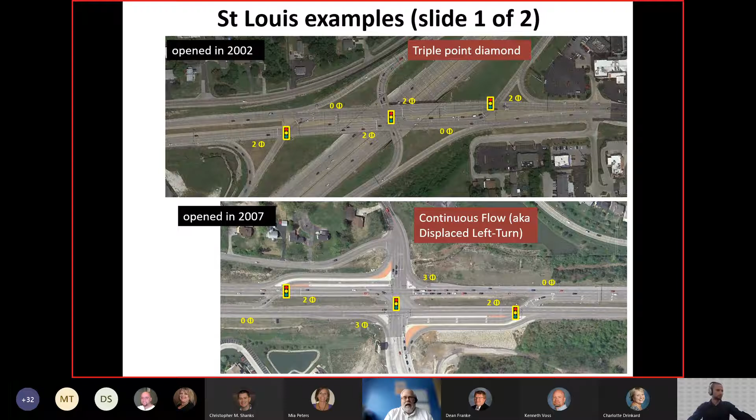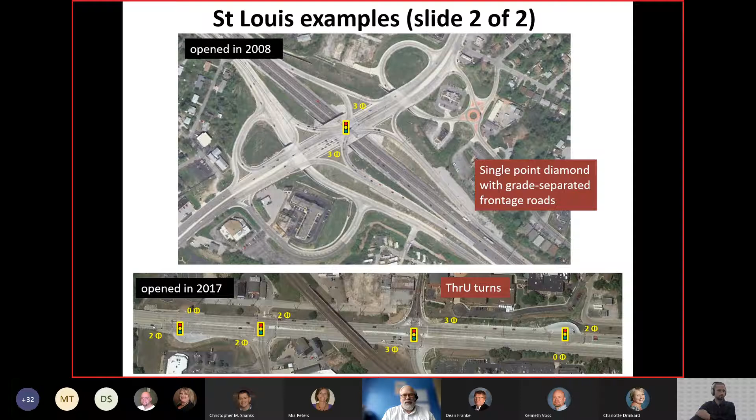So I'm not here to talk about what St. Louis has done, but we do want to recognize that there have been a lot of innovations across the state, and that we've learned from some of the innovations that St. Louis has done. These next two slides show some of the things that we have noticed over the years. But if you have any questions about these, feel free to contact St. Louis. I'm sure they'll tell you all about them.

This next series of slides wants to kind of recap some innovations that have been around for a while, but are still relevant when we talk about innovation.

This first one is roundabouts. In the Kansas City District, we've used them quite a few times at interchanges and at rural intersections. The one in the upper right is actually a St. Louis example where they used a roundabout to build an interchange with a two-way outer road. Another innovation that we have openly stolen from St. Louis.

But I think what's maybe important to me about roundabouts is having an approach where you consider them anytime you have an operational or safety issue. In our district, any rural two-lane roadway where we have right-angle crashes, our default is to look at a roundabout. When we're looking at our outer suburbs and two-lane roadways where we have rear-end issues, we look at the traffic volumes and see if it's close to warranting signals. And if it is, we start looking at a roundabout.

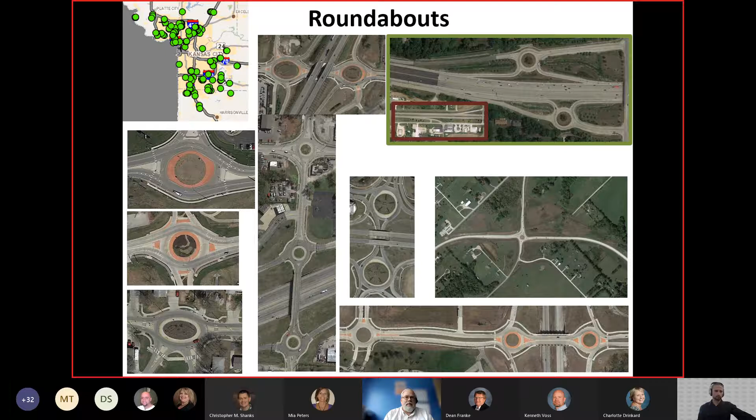Now this one is kind of an interesting one, and actually the ribbon cutting is supposed to be in a couple weeks for this. This is actually a roundabout interchange that Ryan and I both opposed. It operated far worse than a traditional diamond did.

The safety was quite questionable. We couldn't find any research on the safety of a six-legged multi-lane roundabout, and the data we could find for four-legged multi-lane roundabouts was very mixed. But the city was quite adamant they wanted a roundabout here, so the bulk of the risk was on the city system. We're like, all right, it doesn't impact the interstate negatively, we'll go with it.

Maybe we haven't talked in detail about traffic modeling yet, but on the flip side, this isn't one we're thrilled about the results on. Oftentimes we're looking at traffic volumes 20 years out in the future, so that's a discussion point to remember, that a lot of these alternatives we're weighing against each other are considering problems that are there today and that might be there in the future. The stakeholders in this case felt that traffic growth in the future might be a problem to solve later, but since there's not congestion today, they were more open to maybe the capacity constraints of this roundabout.

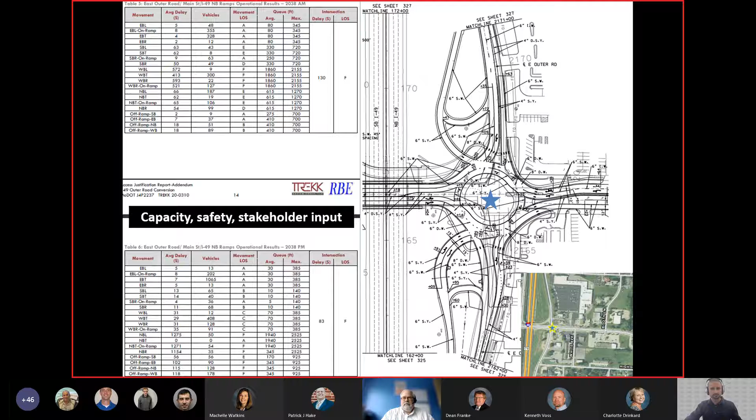Another current favorite is J-turns. We have implemented quite a few of these on the rural 50 corridor in our district. There's a lot of ways you can go about building a J-turn - short J-turns, long J-turns, lefts allowed, lefts prohibited. My personal favorite is the short J-turns, but MU's research on J-turns showed that longer J-turns were generally safer.

So whenever we can, we try to build our J-turns long, but site-specific characteristics don't always allow for that. Something new we've started doing with J-turns is on US 169 on the north side of our district, where to the south of this section US 169 is a freeway, and to the north is a 5-lane signalized arterial. So we have this transition area where it's not a freeway but not an arterial - it's truly an expressway. We've got a lot of development going on in that area, and developers have built one J-turn, and we're in negotiations with another to build a second J-turn to act as a transition from freeway to signalized arterial.

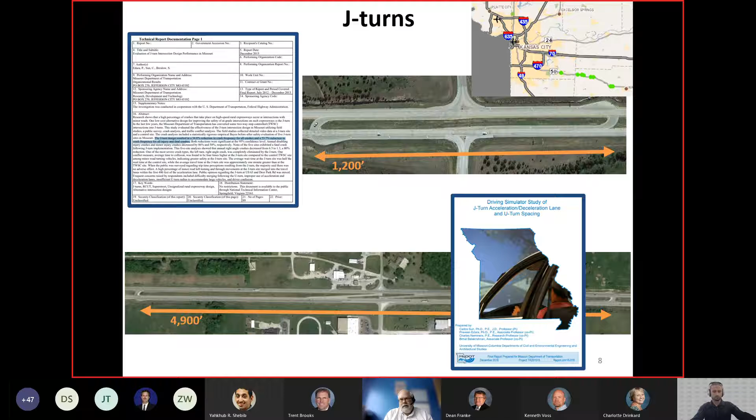Here's one of the J-turn locations on 50 Highway. This slide is just to highlight how over the years we've tried different things to fix our crash problem at US 50 and MO-131. We added turn lanes, then we added offset lefts, and finally we've gone to J-turns. If somebody finds something better than a J-turn, I'm sure we'll implement it here as well.

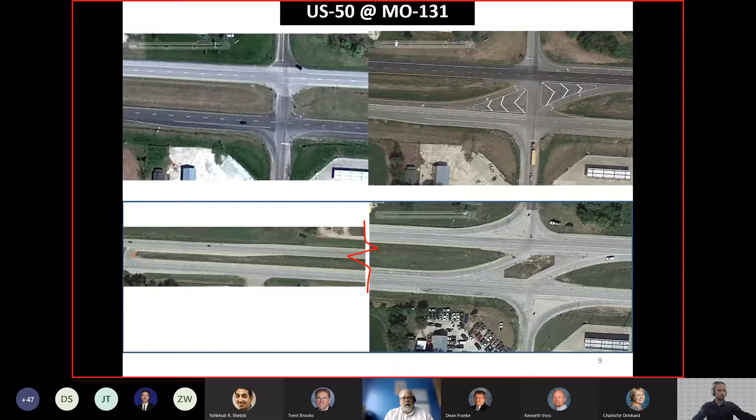Then of course we've got the flavor of the month, Diverging Diamonds.

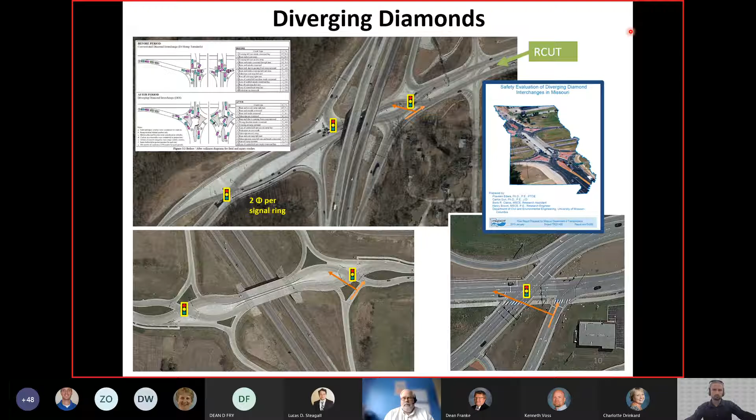This slide talks about some of the challenges with a DDI. Probably one of the biggest is maintenance of traffic. Anytime you convert from one traffic control type to another, there's the challenge of switching from old pavement to new pavement, and DDI is no exception. You really have to be mindful of making sure you always have pavement in place for traffic to traverse during construction.

Another interesting piece of the DDI is the turns—do you signalize them or have them yield? I understand Springfield has even implemented flashing yellow for the left turns, which we haven't done in our district yet, but I'd be interested to see if there are locations that would be good for us to try that. And then there's the whole right or left turn on red question.

Kansas City is interesting in that the city has an ordinance allowing left turns on red, whereas the state does not. So far we've decided to remain silent on the issue, and I haven't heard any feedback that there have been any problems. I think we'll continue to maintain silence on it, but someday hopefully we can get a statewide left turn on red law passed.

The other aspect is anytime you have turning or curved movements, you have to be aware of your design vehicles. With a lot of these interchanges occurring on the interstates, there are a lot of large semis, so you have to be aware of their tracking movements and make sure they can traverse the turns. Anything you want to add on this one, Ryan?

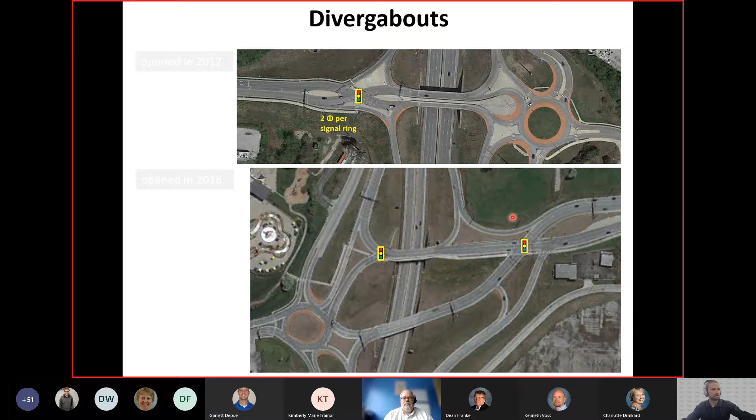The top of the screen is a location at I-49, the freeway, and 155th, the arterial. The bottom of the screen is US 50, the freeway, and Route 291. I'll go through some of the details on those jobs.

The first example location had no pedestrian accommodations. It was in the STIP for a bridge replacement, and it already had substandard vertical clearance. It started as a conventional diamond, and the operations weren't atrocious during construction, but there's significant growth predicted on the west side, particularly at the interchange.

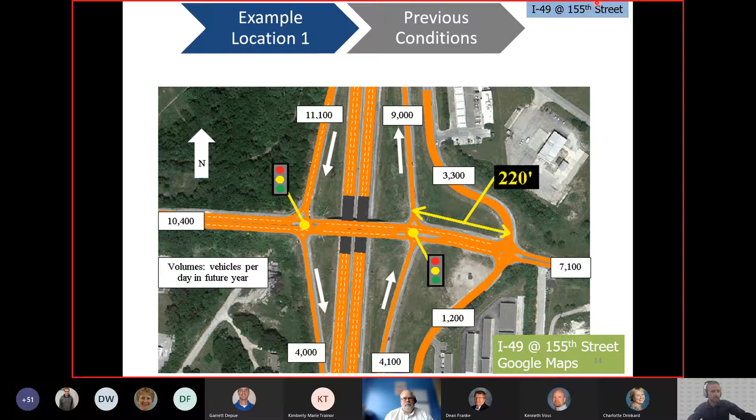You can see some of the volumes here, and again the west side and north side are heavier traffic volumes. So we wanted to make sure our traffic models considered that in the future. You can see the highlight on the 220 feet between the northbound ramps and east outer road, and that was really important as we looked at alternatives.

The program we use a lot is called VISSIM. One of the cool things about VISSIM is it's very customizable. It maybe takes more time to set models up, but the results are more detailed and more powerful than some other tools. Not to say VISSIM is always the right tool, but in this particular case it worked out really nicely for us.

Here are some of the alternatives we looked at, and we did cost estimates for all of these to try to narrow the options and figure out what would be best. Relocating the outer road, as you see on the bottom, is a common approach. In this instance it was unfeasible because of site constraints - there was a cell tower in the southeast corner, so the right-of-way implications were simply too much.

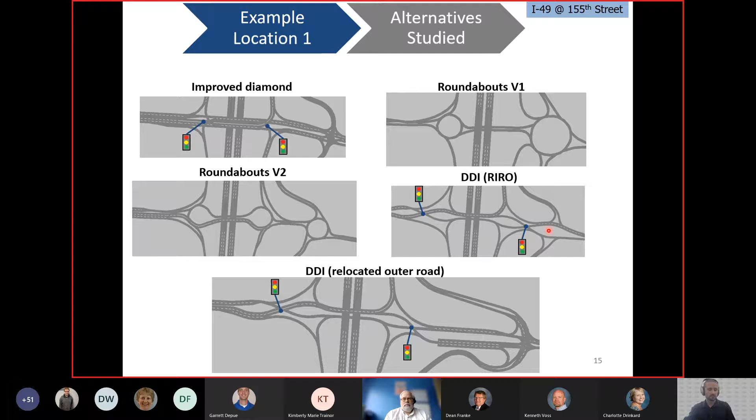The other common alternative with DDIs is the right-in, right-out, this acronym here. You can see this east outer road - there are no lefts allowed at that location, again a function of the distance to the crossover. When DDIs get built, generally the signals get further from the ramp terminals, so the spacing to the outer road is even more problematic. That's how we came up with using the roundabout as a way to flip the DDI back over, if you will.

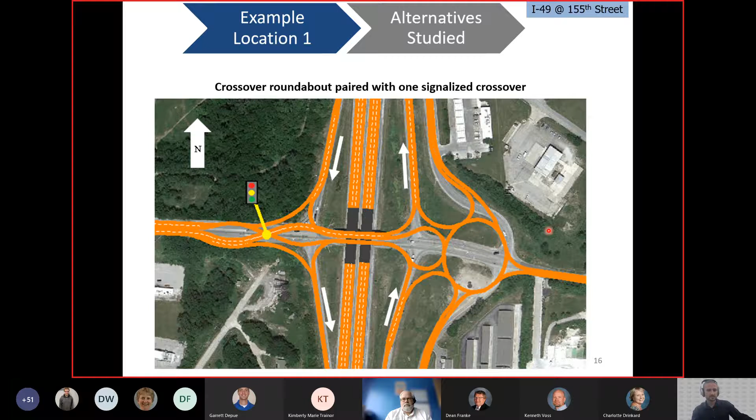So you have the DDI on the busier side of the interchange, whereas the roundabout, in this case, is just a single lane roundabout over on the east side where there's single family homes and less growth anticipated.

Here's a summary of some of the volumes we considered. This is trying to convey that the volumes entering and circulating at the roundabout for a normal roundabout would have been much higher than with this divergabout, this combination of diverging diamond roundabout. As you lower the sum of the conflicting and entering volumes, you're able to provide better levels of service longer, with less queuing and less delays. So the divergabout, this proposed design, reduces the conflicting plus entering volumes.

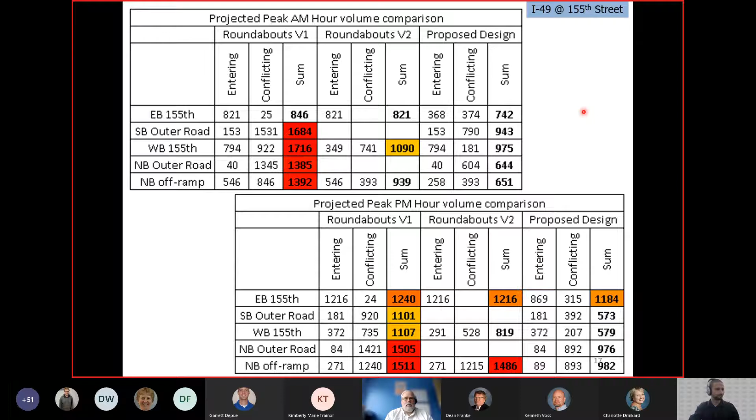Another thing you'd look at is delay of vehicles and travel time - these are the measures of effectiveness, the MOE, that VISSIM can provide us.

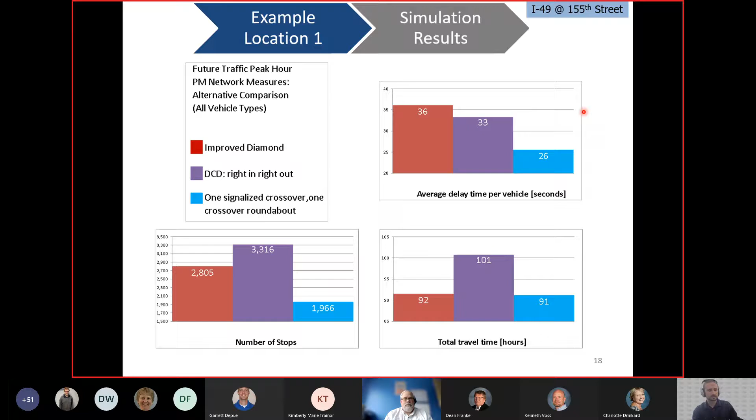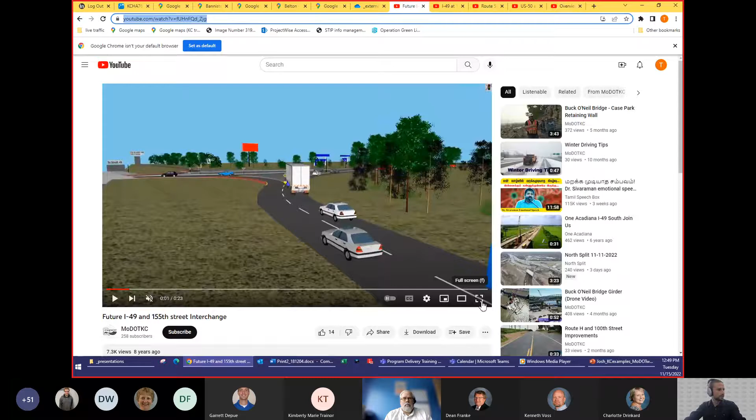Here's one of the public outreach displays we had. I'll show some of the other material that we used on this job.

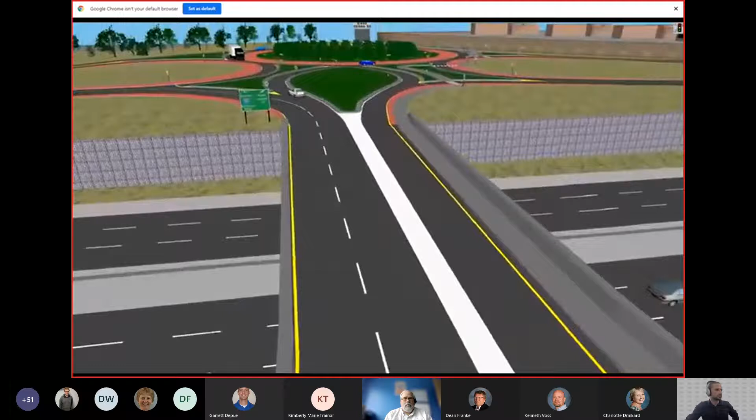So here is a video, again from VISSIM, just demonstrating a certain movement from this interchange. We wanted to demonstrate the unique movements for the stakeholders.

This is kind of the one I talked about where on social media, some people say, oh yes, okay, I understand what you're trying to do, and others say, oh my gosh, what are you doing, you're just trying to be different. But ultimately, what was attractive to us about this was the bridge width and some of the other attributes that roundabouts and DDIs can provide.

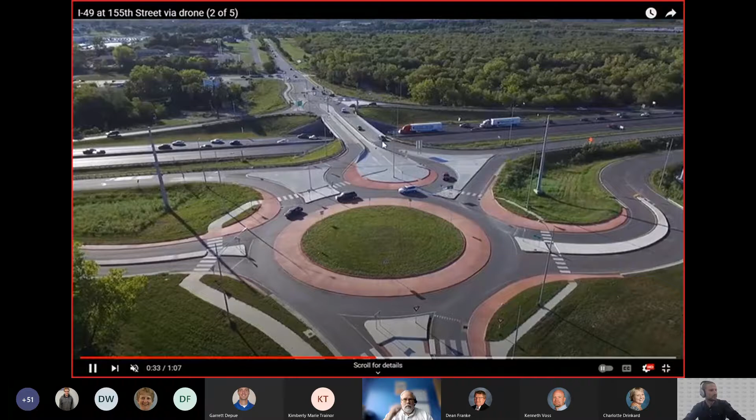This little video is going to rotate around, so currently we're looking west. You can see down here on I-49, that's sort of an afternoon congestion issue on the freeway. Here we're looking west on 155th, and you can see the single lane roundabout operating next to the DDI portion on the west.

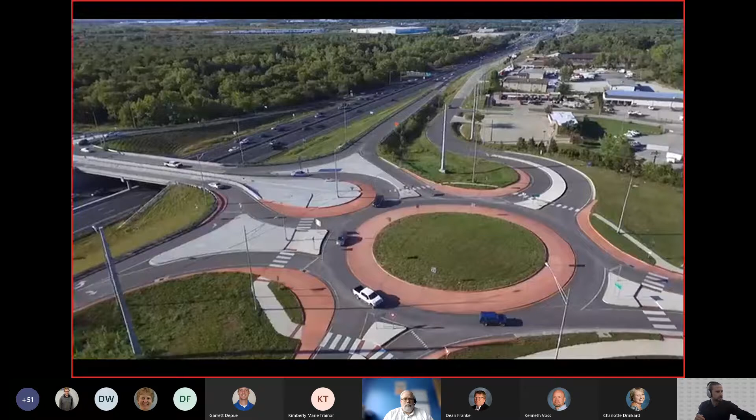This is a nice view of all the pedestrian facilities here. This location, when we started the job, had no facilities at all, especially on the bridge. You can see the shared use path on the south side, and then as it crosses into the DDI, the path is between the two directions of travel.

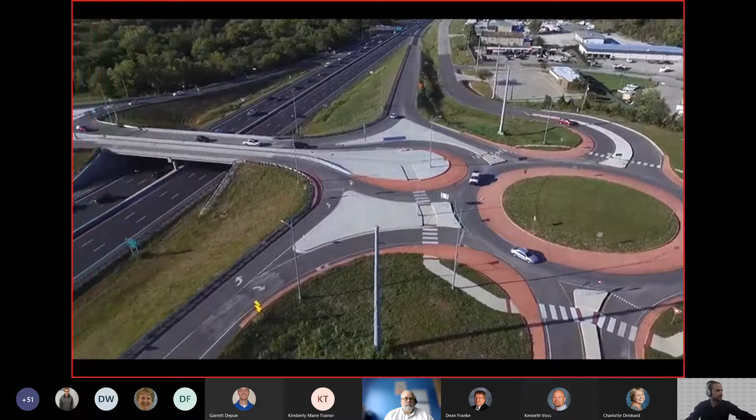Maybe we'll talk about that for a second, Josh. That's kind of a hot button thing, DDIs and having the pedestrians in the middle rather than on the outside. Do you want to talk about the history on that?

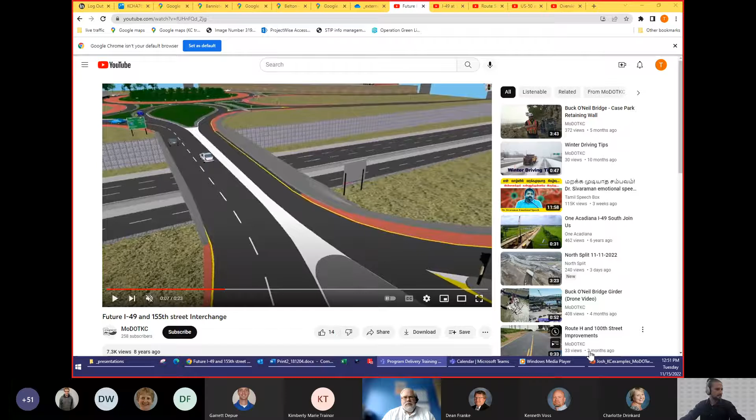We were really uncertain of what to do with the pedestrians, because if you put them on the outside, as is typical with any interchange, you have a conflict with that free left movement coming from underneath the bridge. So we really struggled with what to do with the pedestrians, and give credit to Springfield with their first DDI, where they put the pedestrians in the middle, reducing the number of conflict points for all the crossings of vehicular traffic.

But one of the downsides we've heard quite a bit is that it's kind of uncomfortable walking in between two directions of traffic. So there's a sense of unease about having pedestrians in the middle, but in terms of safety, I think it's the better way to go if you can pull it off.

It's also interesting how some folks bring up the fact that you're crossing perhaps twice to go through. Maybe the counterpoint is that there are shorter crossings and the signal phasing is such that you're definitely going to get enough time to cross safely. So there are pros and cons to everything.

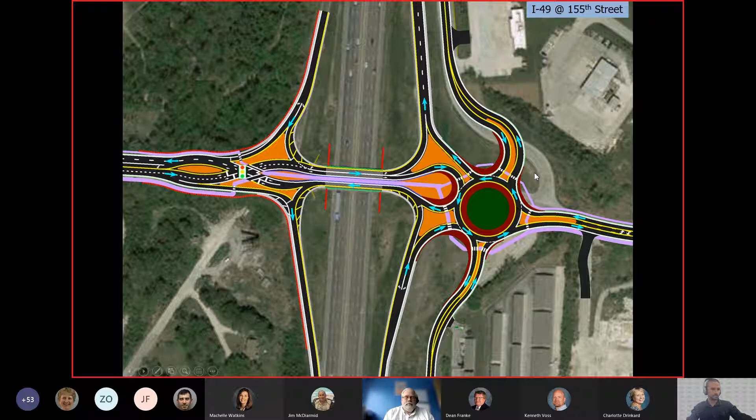I just wanted to quickly talk about signing. That's one of the details that was an in-house design the core team worked through, trying to visualize where these signs needed to be, how many is too many—finding that sweet spot is interesting on every project.

This was later in the process, some of the changes involved diagrammatic signs, or simplistic signs. Since this one was single lane, it was really nice that we avoided larger overhead signs.

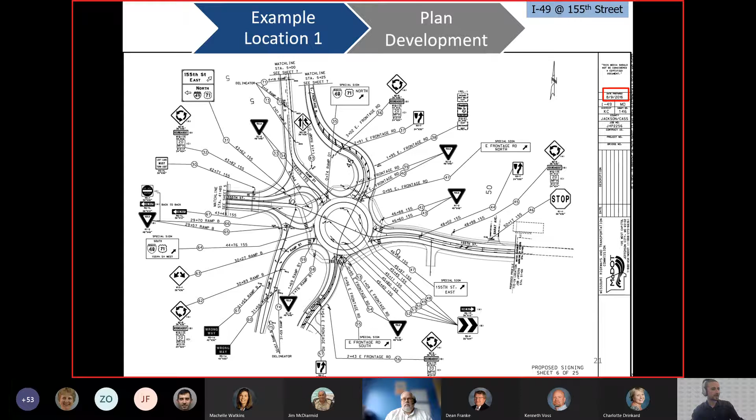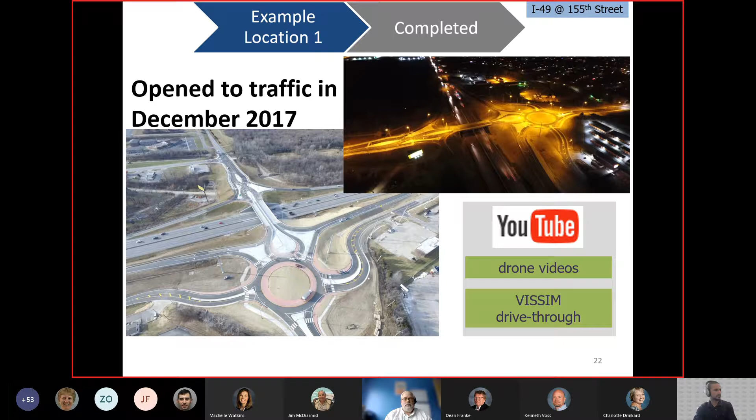So we've seen some of the videos on this one, and that one was opened at the very end of '17. Okay, I'm going to jump to the second interchange location now.

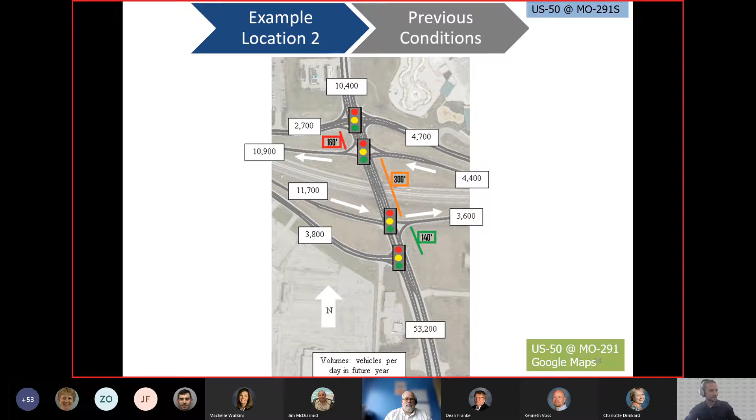The north is sort of like the downtown area of this little suburb, and the south is becoming more like an expressway. The ramps again are heavier on one side than the other, heavier on the west side. So a lot of the heavy movements are northbound left and eastbound right.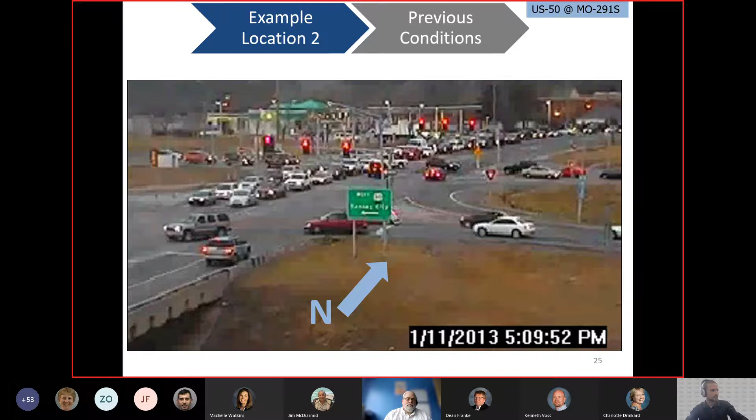These were some pictures of the congestion in the previous condition. Morning and afternoon, there were some pretty good queues out there. It was a 5-lane bridge, with 4 signals pretty close to each other—I guess the 5th being the South Outer Road.

Kind of like the last location, here are some options that we tested out in Vissim: tight urban diamond, single point diamond, offset left, DDI, and loop ramp variations.

The DDI performed pretty well, but again, the struggle was this distance to the North Outer Road was just so darn short that with a DDI, the way the signal timing works, it's very hard to not trap people in the middle. You're almost guaranteed to have a queue spilling into the DDI or from the DDI to the Outer Road. In a minute, I'll show you another display that visualizes that.

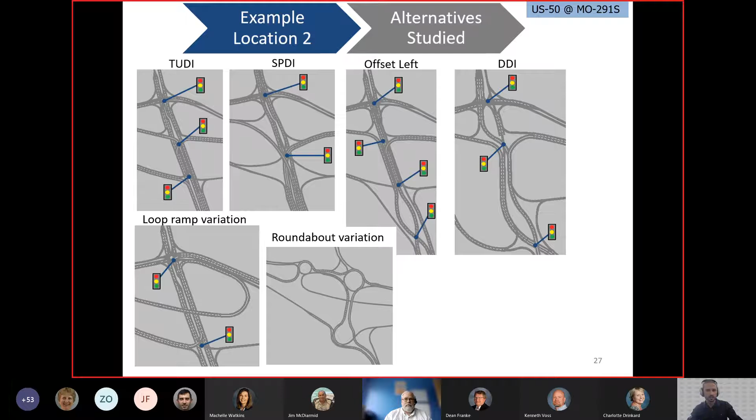So kind of like the last location, thinking about the roundabout volumes conflicting and entering compared to a normal roundabout, this Divergeabout, using the DDI and then flipping the roundabout over, was really nice at this location because of the traffic volumes.

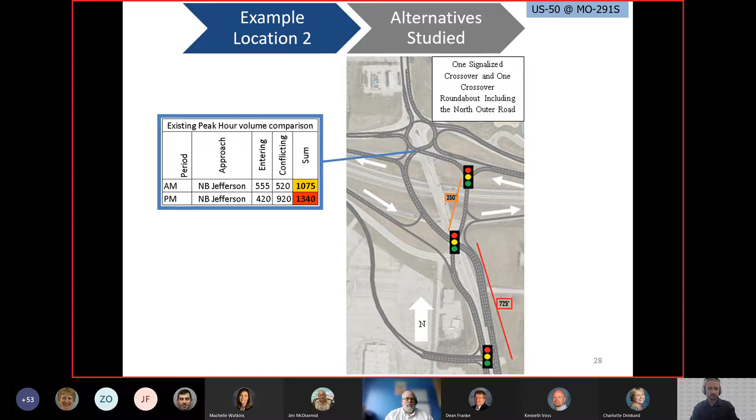Again, we looked at delay and travel time of all those different alternatives to narrow our alternatives down to one preferred alternative.

One of the interesting things about this location is a 2-phase signal here, and the reason for that is we have 2 westbound left turn lanes. So rather than treat that as a yield, we signalized that. And we were cognizant of this distance and didn't want any queues to spill from one intersection to the next, so there were special detectors on this job to keep that area clear.

Like the last one, signing was very important, this one probably even more so. Unlike the last one where a single lane roundabout sufficed with future year volumes, this one uses a multi-lane roundabout, so it's more complicated. You can see some overhead signing and the spiraling pavement markings associated with multi-lane roundabouts.

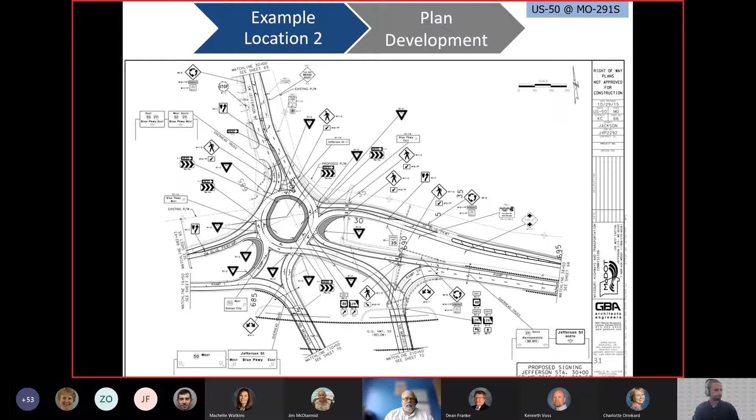I'll pull up some here real fast. I'll just show you this.

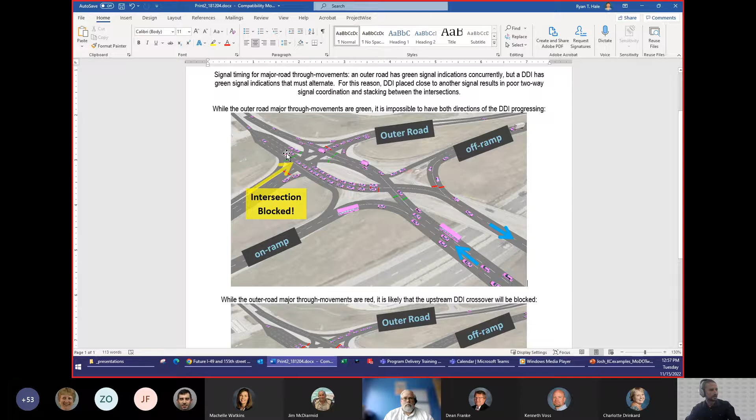Why not just build a normal DDI? I was talking about the difficulty since we're looking northeast here—this is the westbound ramp terminal. Since it's basically split phased, you'll never have the through movements going at the same time, so you're always going to have a really hard time keeping either southbound or northbound clear. It's especially problematic in a DDI when it spills from the outer road into the DDI, because one direction is blocking the other. Notice how this truck is pretty darn close to preventing this car from getting through the interchange.

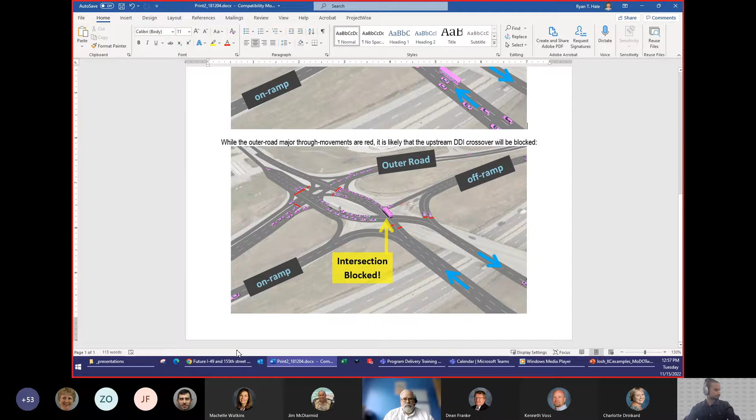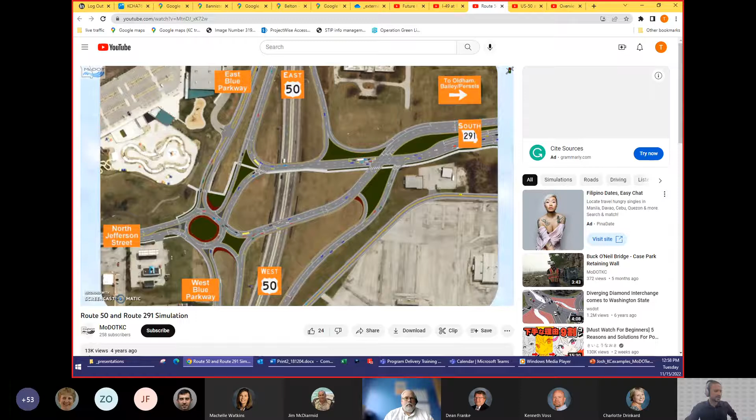Again, we did a Vissim model to show our stakeholders what this might look like. This one was really driven a lot by the city—they were funding a lot of this job, so working with them and communicating these ideas was important.

Again, it seemed like the overhead views are maybe sort of daunting for people, and we don't want to scare people, of course. So we found that these perspective videos that walk through certain movements are maybe a little more effective at putting people's minds at ease about, okay, here's how to be signed, here's what lane you need to be in, that sort of thing.

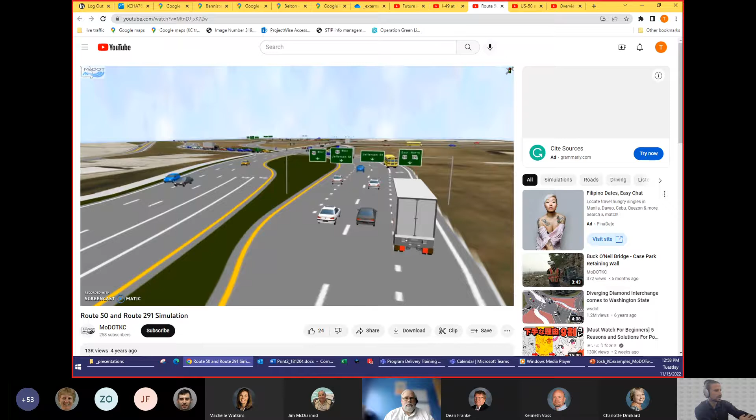So I'll just let this play for a few seconds. It'll just kind of go up to the north side of the site.

Josh, anything to add at this? Nope, not at this point.

All right, I changed my mind. I do have something to add.

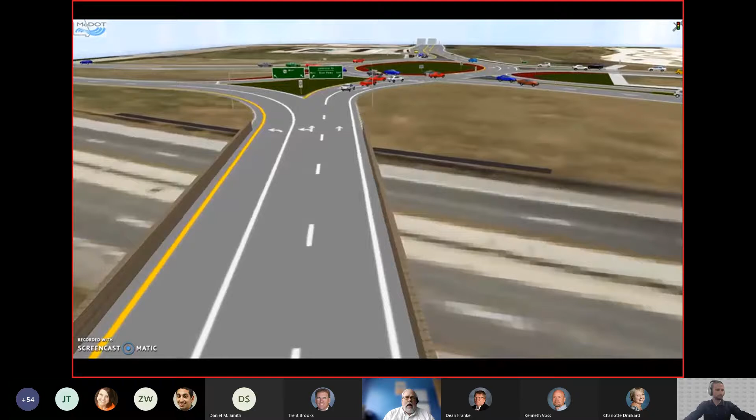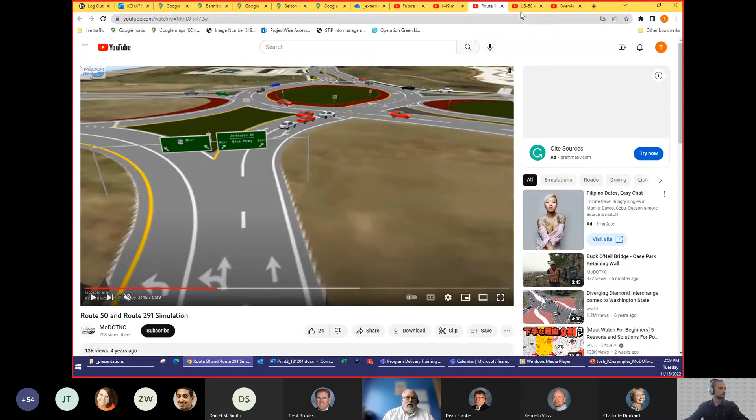I think it's one of the important things to consider when looking at a roundabout interchange versus a divergeabout interchange is the movement that has to yield. At a typical roundabout interchange, vehicles entering the interchange area have to yield to vehicles exiting. But in a divergeabout situation, the vehicles exiting the interchange have to yield to the vehicles entering. So if you have high through volumes, you have to be careful not to create a situation in a divergeabout where traffic trying to get out of the interchange is blocking other movements.

Good point. Thanks for bringing that up.

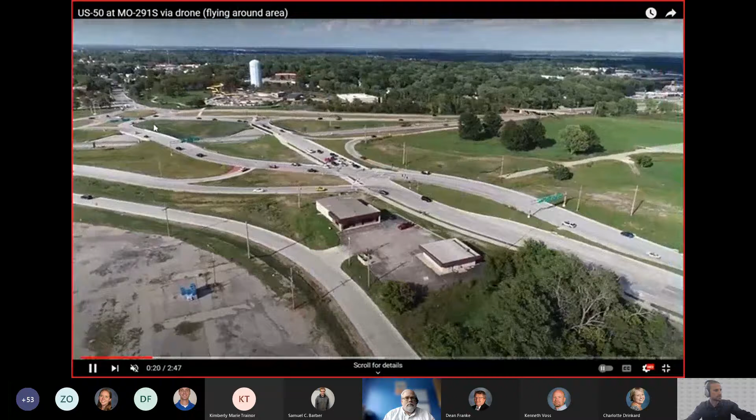In this case, let's say hypothetically we had built a single northbound lane entering the roundabout. When we tested that out, we found really problematic queuing, and the drawback would be that the queue would spill to the south and then toward the DDI. That's why we ultimately went with the multi-lane roundabout in this location.

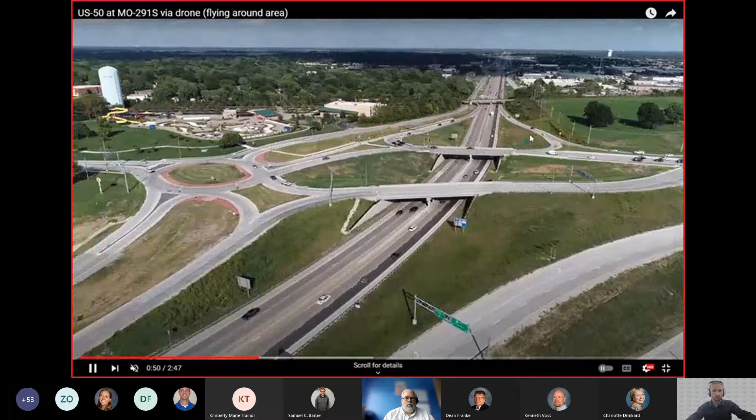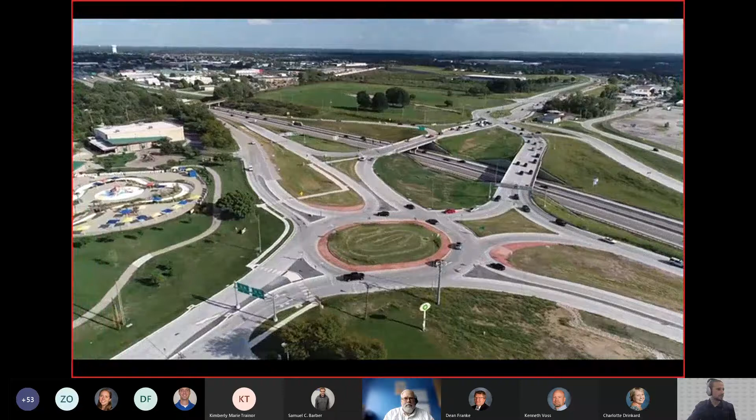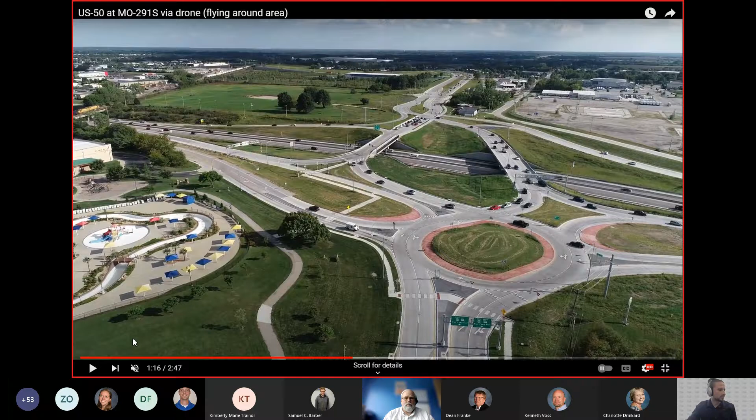This one was opened, I think mid-2018 maybe. You can see here, same approach with drone video. Most of the biggest queuing we saw previously was back in these areas, the northbound traffic. Since this opened, I'm not aware of any congestion at this spot.

The city was also really excited about this interchange project because they have high hopes for the nearby vacant land. Remember how we talked about that side of the interchange already being higher in volume, and it's predicted to get even larger. So that worked out pretty nicely with this geometry.

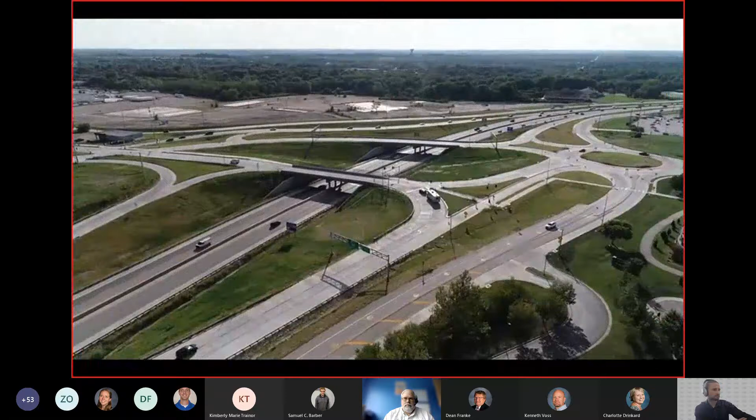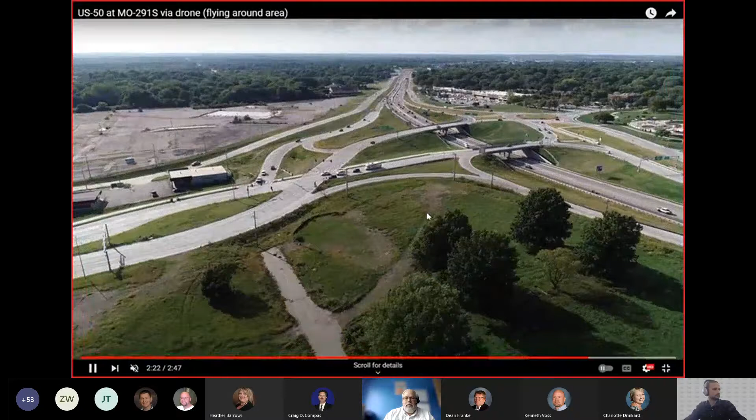You'll notice as the drone was going around that there was a water park there, and that was one of the constraints on relocating the outer road. We have a railroad just to the east of this interchange, but then this park, so we really couldn't move the outer road, and the diverging diamond allowed us to bring everything together into one intersection.

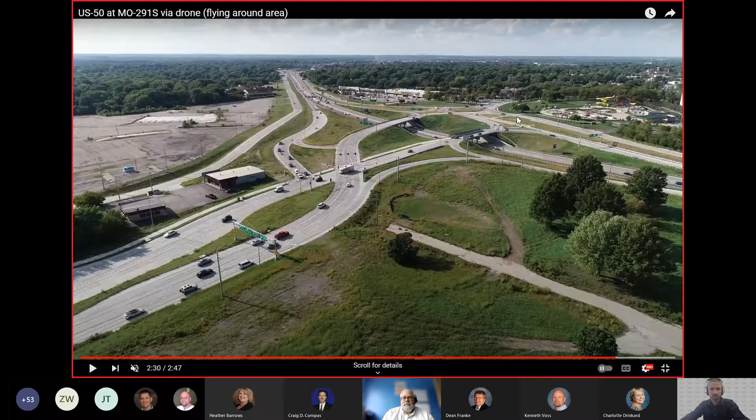Yeah, that's a good point, Josh. That's kind of another common thread those two example locations had, that relocating the outer road just wasn't feasible.

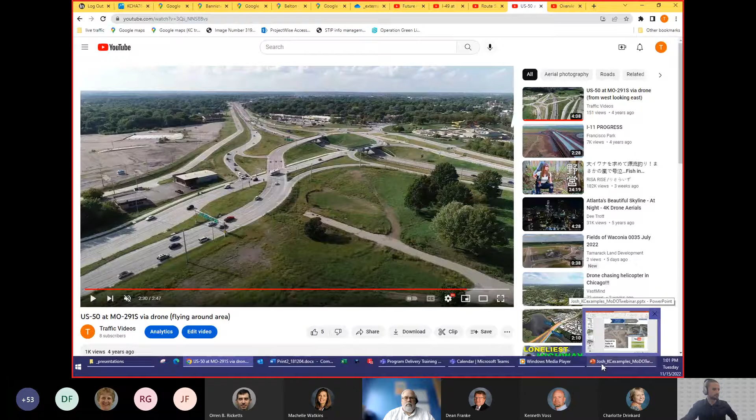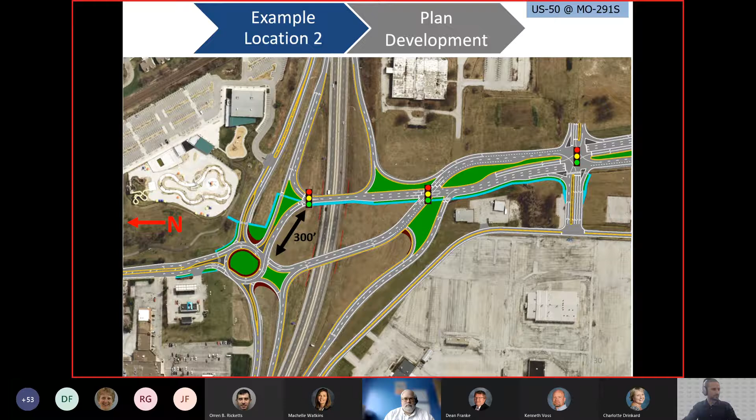I guess I didn't highlight the pedestrian facilities, but that was an important consideration on this one. You can see this light blue color, where they're sort of in the middle of this DDI, if you will, where they don't have to cross this free-flowing left turn. That's definitely a location where myself and other pedestrians are enjoying the connectivity now.

Okay, one more detailed alternative that we'll talk about. This one is kind of on the north side of the city. It opened in very late 2019, I think it was. It's a displaced left interchange, sort of a cousin of a single point and a DDI, if you will.

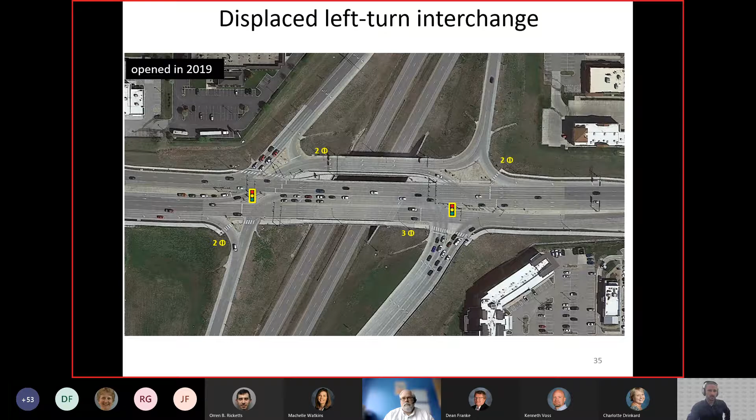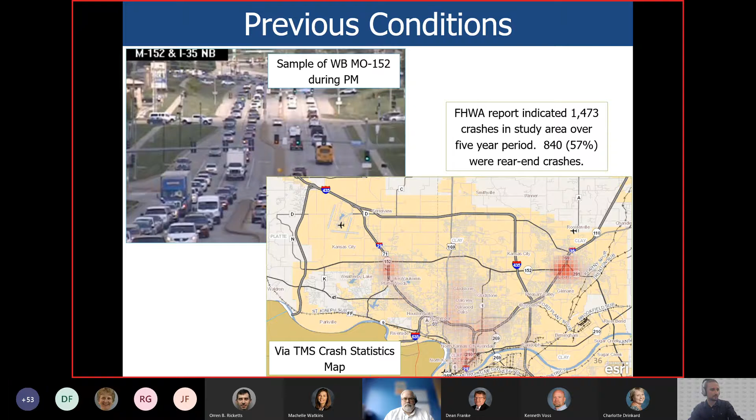Before this interchange was done, there was significant congestion on the corridor. Here we're looking east along the corridor at some westbound congestion, and then you can see the TMS crash map down on the bottom right. It's pretty zoomed out, the whole metro area. You can see this interchange area, it's 35 and 152, really stood out as an area that could have used some improvement.

A lot of rear end crashes, which is maybe indicative of congestion. So like the other locations, we used traffic models to try to weigh some pros and cons of different alternatives. We looked at a traditional diamond, single point, DDI, and like every other job, none of these is a magic bullet. It's not, oh, DDI is popular this year, we got to build a DDI. It's all about traffic volumes and growth, pedestrians - all those attributes are site specific.

But unfortunately, our left turning volumes weren't really balanced in this case. We had a lot of northbound lefts, but not so many southbounds. So giving all that time to the southbounds, because in a SPUI they're concurrent with the northbounds, wasn't really very advantageous. Also the clearance intervals in SPUIs are very challenging. This one's also on a skew, so the bridge would have been ginormous.

The DDI at this location really struggled because the east and westbound through movements are both really high. In a lot of locations where we have success with DDIs, it's because the volumes are really directional, not balanced throughout the day. But here, if you have a high volume in each direction, they basically have to wait on each other at some point - you can't have both directions getting green simultaneously. So the DDI in this case didn't really work out.

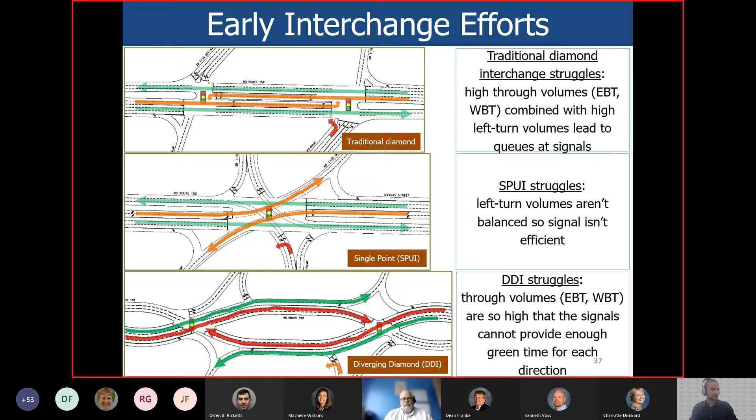Whereas this displaced left, where there's different signal phasing, is a lot more efficient. Rather than 3-phase signals at each ramp terminal, we're able to move traffic a lot quicker and safer. So it was pretty staggering differences in this case, where we had a lot less delay in travel time, and a lot more vehicles were able to get through with this displaced left geometry.

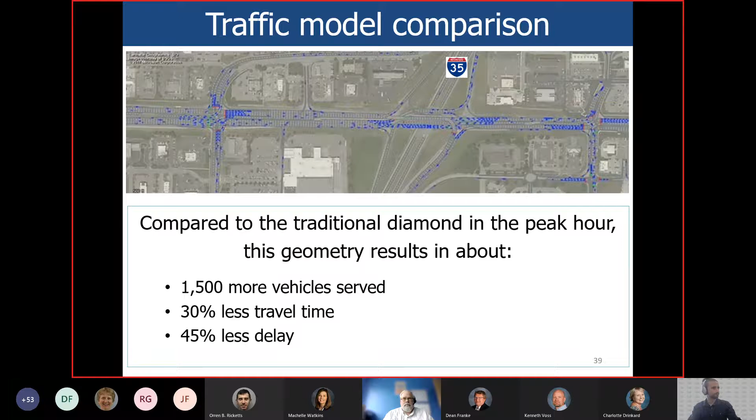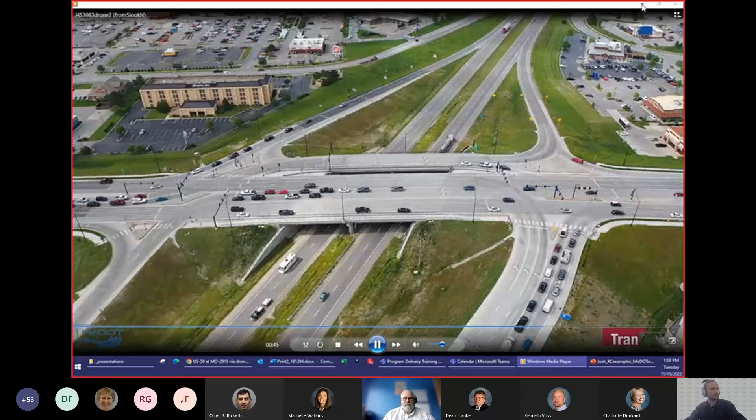I think we also had a similar VISSIM video. So just like the other ones where we wanted to focus on certain movements to kind of demonstrate to folks how they would drive it.

It's kind of funny at the public meeting for this one, if my memory serves correct, some of the ones with roundabouts, people are a little bit more hesitant about. For whatever reason, roundabouts are more daunting, but DDIs, at least in this part of the state, folks have really bought in. And when we showed them this video, it was actually kind of funny that we had to convince them, well, actually, it's not just like a DDI, because when they saw this, they said, 'Oh yeah, I know that. I do this movement. I've done that interchange before.' So it was kind of a unique situation where we talked about the similarities and a little bit of the differences.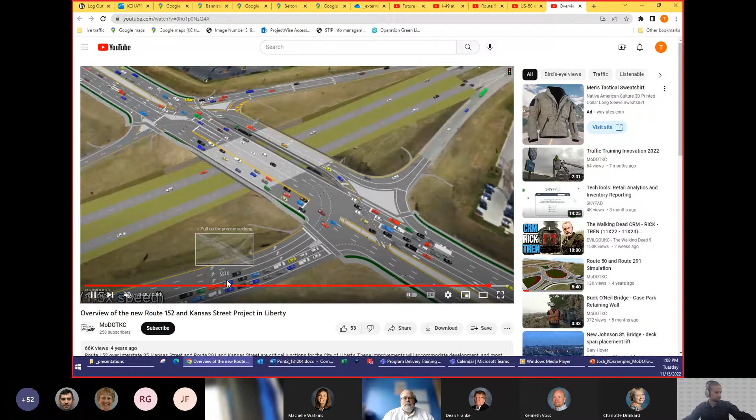Anything else on that, Josh, before I hand it back over? Nope, I think you covered it all.

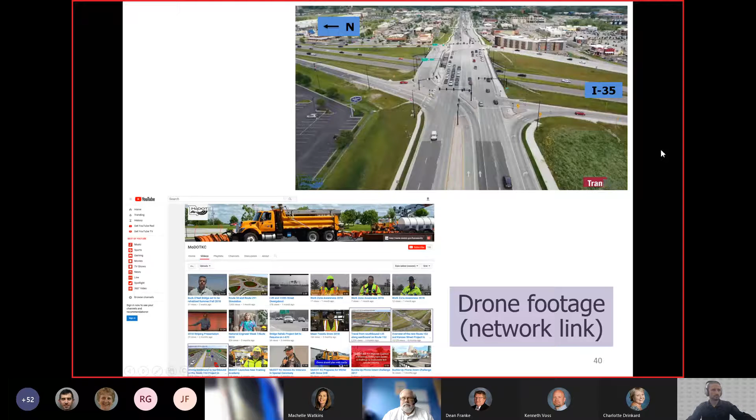And so then we're going to wrap up our presentation talking about some other innovative things we've done, as well as some things we've thought of but haven't been able to accomplish. So this first one is an interchange up north, actually just interchange one south of the one we just talked about, at US 69, Pleasant Valley, and I-35, where we had this antiquated design where the ramps were in the middle of the interchange, as you can see on the left side. But having a crossroad with another arterial coming in kind of from the corner really presented challenges of, okay, so how do we get all these movements to and from the ramps to 35? And what we came up with was actually, we put 3 of the ramp connections on the east side of the interstate, and then the 4th one is on the west side.

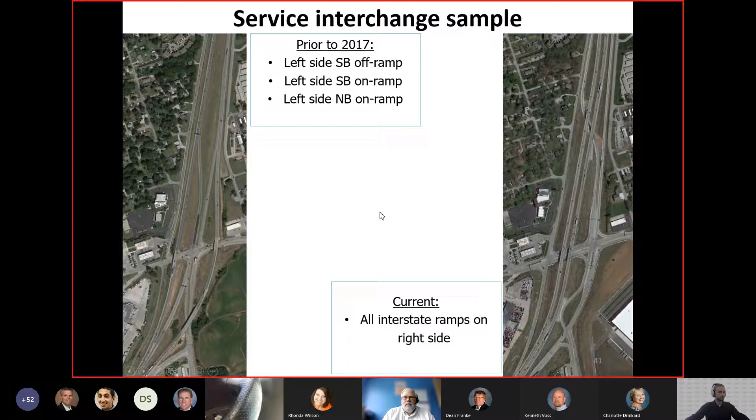Like all these others, we looked at every variation we could think of, single points and that sort of thing. We settled on this variation of an offset single point interchange, where we put 3 of the ramps on one side and the 4th on the other. Anything you wanted to add on this one?

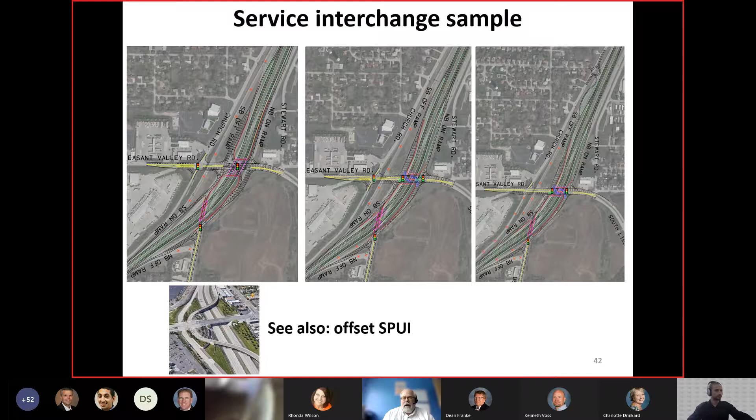Next, and this one's maybe a little bit different. This was a project we were doing on I-435 on the south side of Kansas City, where we have several closely spaced interchanges. We were trying to figure out how to accommodate all this on and off traffic. The traditional solution is to do a CD road when you have closely spaced interchanges.

What we discovered was that when we combined all of those ramps into a single entrance and exit from mainline, we were actually creating hotspots of traffic entering and exiting mainline I-435. So we wound up basically leaving 435 with the closely spaced interchanges, because it spread out the entrance and exits from mainline.

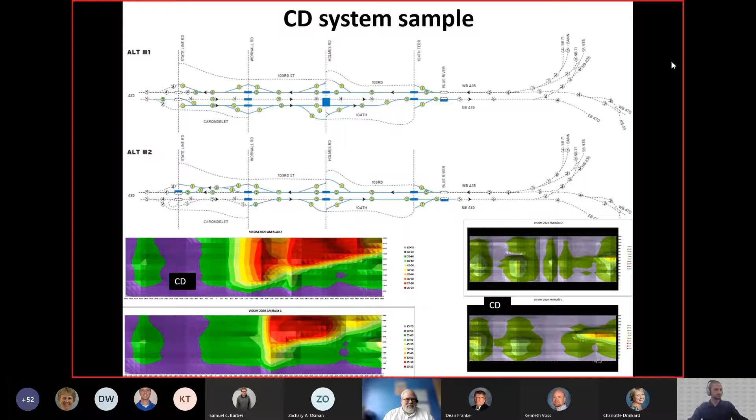Ryan, anything you want to add on these examples? I guess it's fun to do these gigantic jobs where the bridge has to be replaced and there's millions of dollars on the line. Sometimes it's really impactful also to see spots like this that were on our scoping list for congestion issues, and then we can fix it in a week.

After you're modeling it and stuff, maybe you don't need a wider bridge. Sometimes we have these thoughts in our head about, oh, we've got a traffic jam here, and by golly I know how to fix this - we're going to do this and this and this. Maybe we can buy ourselves some time with something simple like signal timing. On these, it's important that you work with your traffic engineers, because innovative signal timing sometimes requires specialized signal equipment that you may have to work through as well.

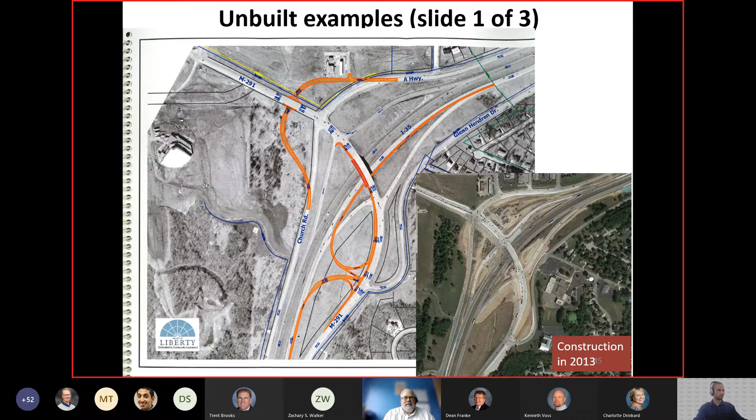Now this intersection type is kind of unique, where at the main intersection you don't allow any lefts. All the lefts are forced onto a quadrant road - another road around the intersection. This allows your main intersection, which is often congested, to operate freely, while you put all the left turning traffic onto this quadrant road. These secondary intersections are usually less crowded, so you're able to give adequate time to the left turns.

We've analyzed them in this type of intersection at a couple of locations. It's never really risen to the top, but we keep our eyes open, hoping that someday we'll be able to fix something that can't be fixed by anything else with a solution like this.

Maybe something just in the weeds, but one of the things that's come up about this concept is that unlike the J-turn or the R-cut, where you're using islands that prohibit certain movements, with this configuration you're really dependent upon drivers to not make a left where they physically can. So that's maybe a pro-con to consider, where if people really want to make a left, technically they could.

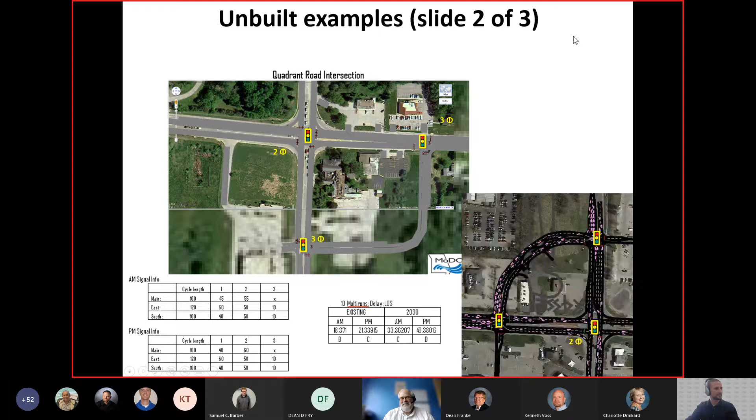Maybe the St. Louis people are just better behaved than the Kansas City people. I don't know. Somehow I have a doubt.

And so this last example is actually at the I-70 and I-470 interchange, where we have a service interchange that's way too close to the system interchange. The traditional approach is to braid those movements to get the proper spacing, but our concept is to actually move the system ramps further away from the service interchange to provide better spacing.

And in this instance, using a partial turbine configuration. Also, kind of another interesting aspect is we're considering braiding the loop ramps. There's too much traffic on those two loop ramps to create a weaving section, and so instead we're looking at braiding them.

At this point, this interchange has never risen to the top for funding, so it's still kind of waiting in the wings to see what we actually build here. But this is something we're still kind of kicking around as a potential alternative.

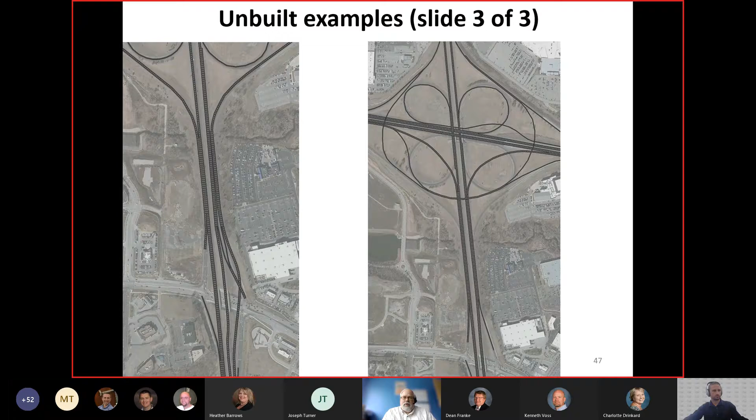And with that, we're done with the presentation. Do we have any questions?

Thank you, Josh and Ryan, for sharing these alternative approaches to these projects. These projects really demonstrate the importance of taking the time during the planning and scoping phase to make sure that we get the best value. I think that takes a little bit of time up front, but obviously provides a lot of value at the end. So I think it's important for everybody to understand that.

Also, it demonstrates the importance of having public involvement and stakeholder engagement. Obviously you have to have buy-in anytime you're doing an alternative project like this. So it's important that you use some of these modeling tools to demonstrate what it's going to look like, but also understand how you can use those tools effectively to communicate that. Because there's all kinds of ways of doing that, but sometimes, as Ryan said, it can confuse people even more, so you have to figure out what the best way of demonstrating that is.

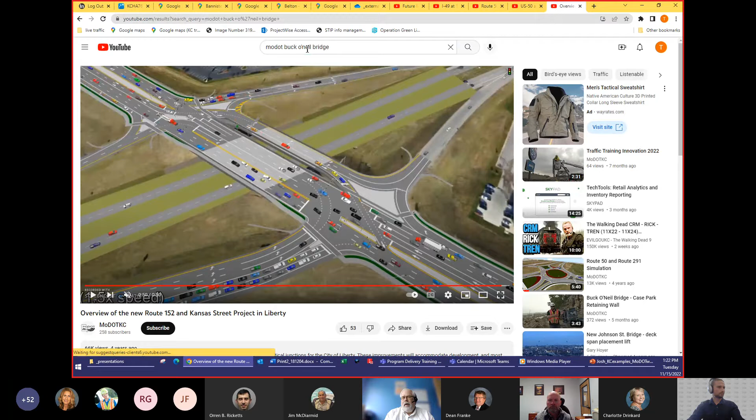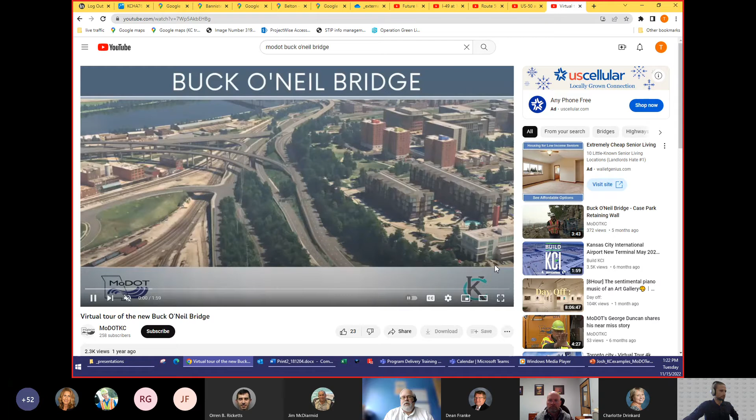Yeah, we were closely involved in that one for sure. The primary factor, I think, in that project was that US 169 approaching downtown is a freeway, but then when it came to downtown, all the traffic ran into a signal there at I-70. So our primary goal with the project, besides replacing the bridge, was to bring these connections from I-35 to 169 into flyover ramps, so they can completely bypass the signal in a freeway to freeway movement. Does that answer the question?

And there were plenty of alternatives looked at for that one. For what it's worth, I was trying to be super cheap and get away from the flyovers, but that was an interesting one where the stakeholders really had a vision of direct connections from one freeway to the other. So we used the traffic modeling tools to look at some outcomes and really wanted to explore all possibilities.

You all kind of explain when you start looking at projects in your district, when you get brought in.

It really depends on the type of project. Something like Buck O'Neil, we're involved even back in the environmental phase of the project, working with the consultant teams to develop the traffic models and brainstorm alternatives, that sort of thing. But then sometimes there's projects, like Ryan mentioned, resurfacing, and it just kind of comes up: hey, we have a problem with this one signal.